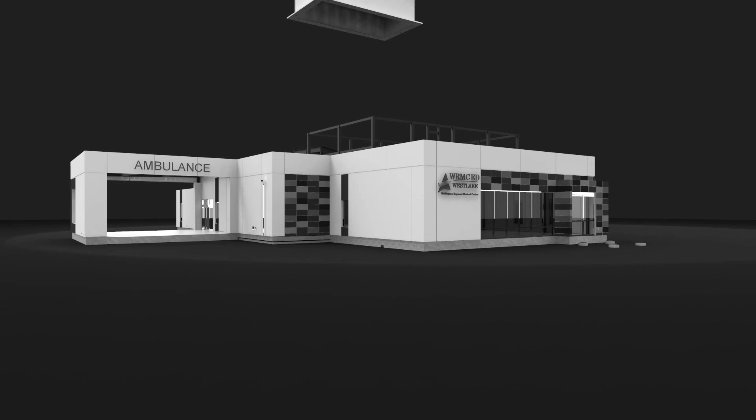In 2000, Honda Motor Company came and said, Chris, we would like for you to lead the design and construction of a really big project in Alabama. It was important for our state. And they said the first phase of the project was a training facility, and it needed to be open 1 year before the big factory was open.

And so we had our first meeting. It was a kickoff meeting. There was no official program. There was no equipment list. There was really not much more than the Japanese leadership saying, we want a world-class facility to train 4,000 workers in 200-person shifts, and we want it 9 months from yesterday. And we, of course, because that was the type of people we are, we said, yeah, that sounds like a great amount of fun. We will take that on, and we did.

Fast forward to our second meeting, and we learned 3 things about the Japanese and their leadership style. Number 1 was they offered all of Honda's resources to help us help them be successful. It's really important. I don't think we would have gotten there without that notion. The second thing that they revealed to us was that I think this was not the first time they had asked their trade partners to solve a really hard problem. And the third one, which was the most important, was there was not a chance in the world that they weren't going to open this thing 9 months from last week.

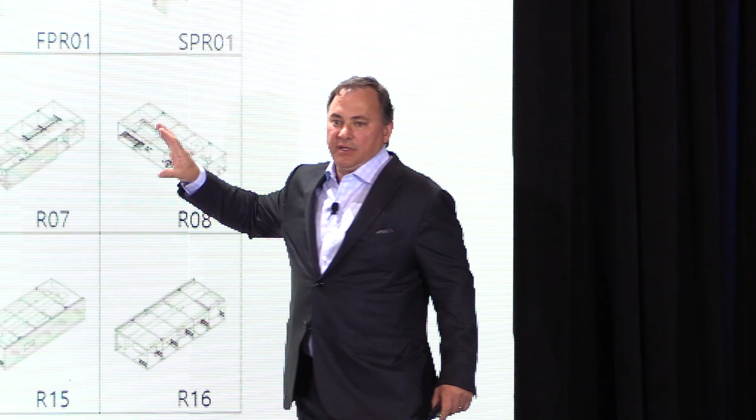I believe that if they ever write this story, this picture, which was Innovation Memorandum 21, Greg Stein published in, say, 2014. But this is the one where he said, these are our parts. We work in 38 states. We have several hundred hospitals, but these are our standard parts. Our standard bathroom, BPR01, it now has a model number. It's a SKU. There's a head wall for med-surg. There is an overhead ceiling rack.

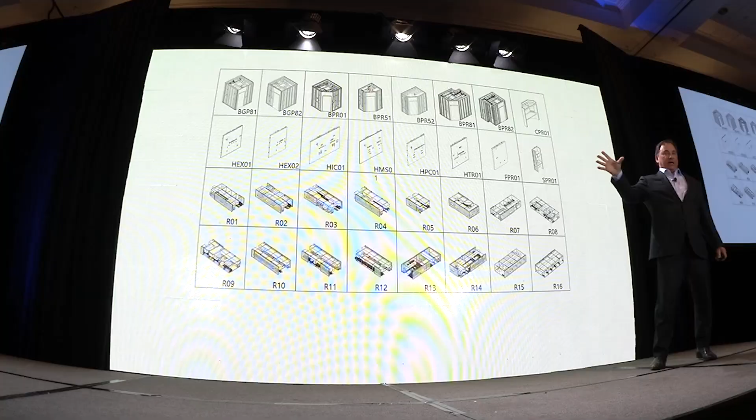There are surgical racks. There are a series of standard parts that defined their standards, not as a design standard, but as an intelligent standard, a manufacturable SKU that could begin to change the supply chain systemically. So these pieces are really interesting, and interchangeable parts become the ability to make a programmatic level decision instead of a project level decision. And these pieces are installed routinely from Miami to Las Vegas.

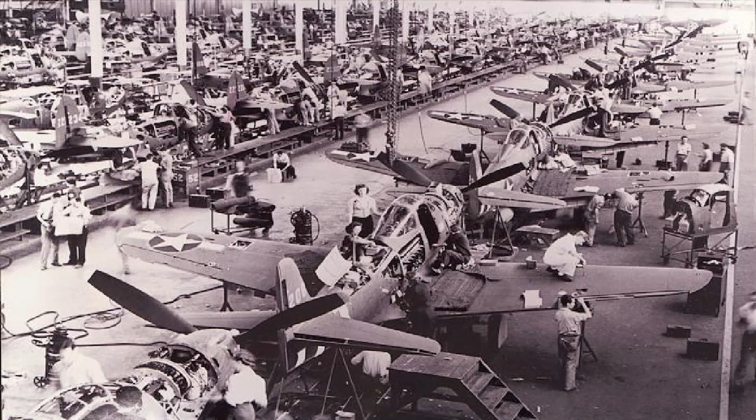And what we learn when we do this is that the way we were making the parts in version 1 was a lot the way they were making the P-39 Airacobra. It is piece by piece. And what we wanted to do is rethink that to a thing that Boeing has adopted in the 21st century to make the 787, which is called chunking.

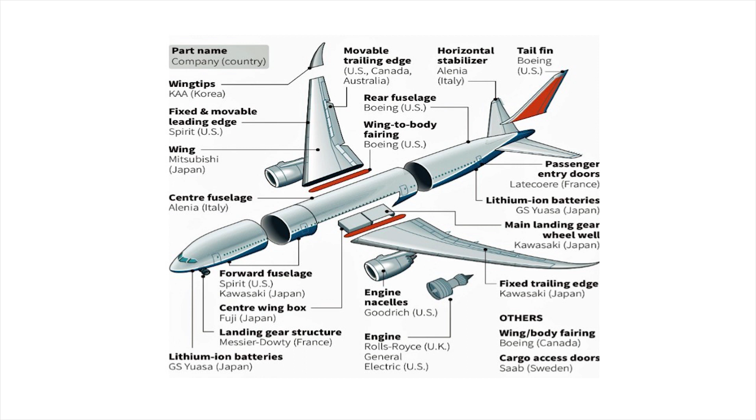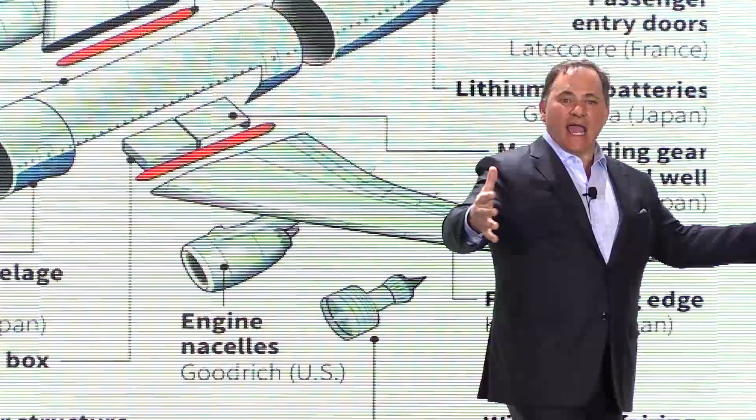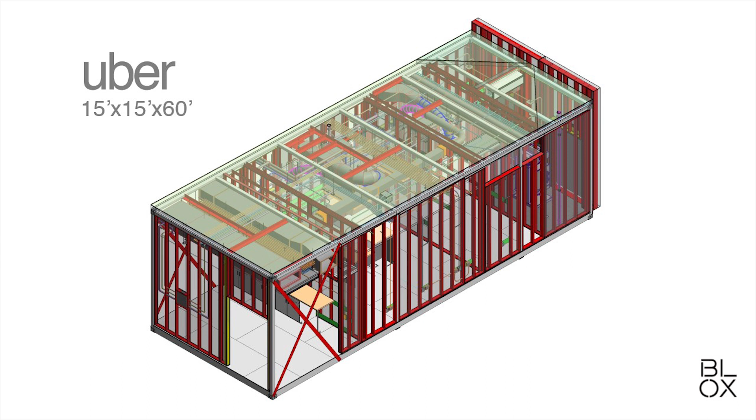Our chunk is called an Uber, and an Uber is not to be confused with ride sharing. It is the largest DOT transport. It's 15 feet wide, 15 feet tall, nominally 60 feet long. It's a red iron structural steel piece that can be stacked 30 stories high. In it, in that universal frame, is a lot of complexity.

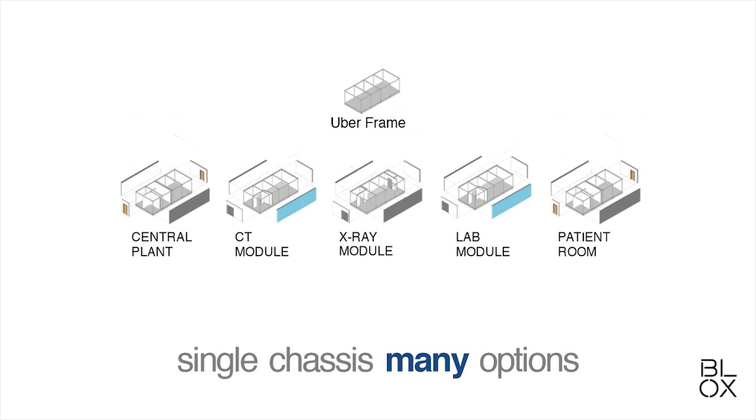We can put a central energy plant in it. We can put a CT. We can put a lab. We can put X-ray. We can put a patient room. We can put a dietary in it. We can put any number of things, and we're adding things all the time.

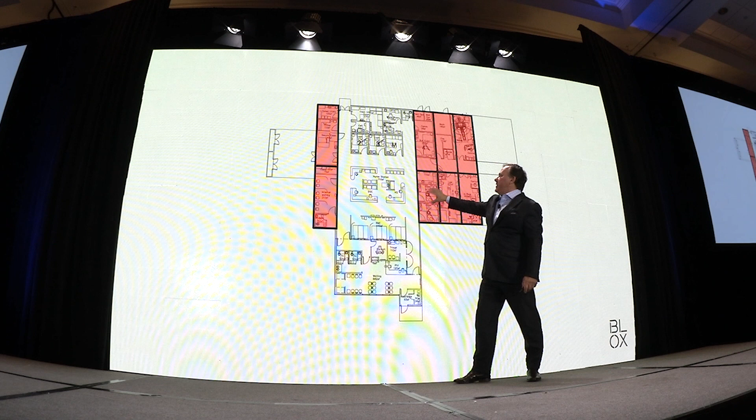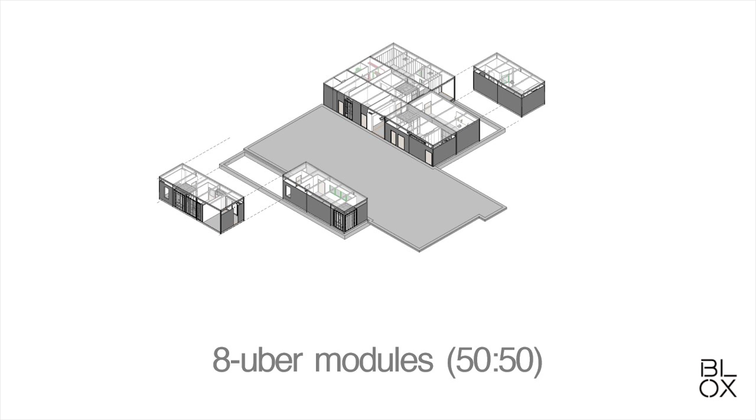We go to the job site, we pour the foundation, it's a stem wall. We add the Uber modules, which represents about 50% of the overall complexity of that building. We add the flat pack steel. We put the exterior siding on. By week 6, we're dried in and conditioned. We put the other modules in, the overhead MEP racks, and then we begin to analyze.

Our analyzing of the data shows that 1, 2, 3, 4, 5 of these were our first group. Our design time went from over a year for the first one. Imagine we're not making a single project, we're really making a platform, to half of that time for the second, still learning a lot, to a third of it, to where we're producing these things in 45 days pretty nicely. A lot of gains on design. There's a corollary to cost with that time.

Manufacturing, our COO, Laura, took over 100 days to build the first batch of 8. It was pretty painful to watch. But her second one was a lot faster. And her third one was faster still. And now she's making one, need to check the numbers, but around 25 days to produce a whole set of the components that it takes to make one of these buildings. Pretty exciting.

And then you can see why I love construction so much. We have improved not one whit. We have now done it 5 times, not a single improvement. In fact, if I look at the micro graph up there, it got worse. We regroup and we decide, how do we fix that aspect of it? We're going to take it 2 ways. Number 1 is we're going to shift more from construction to manufacturing, which means that we have to move it all the way back to design. And the other one is we're going to work at getting better at being a contractor.

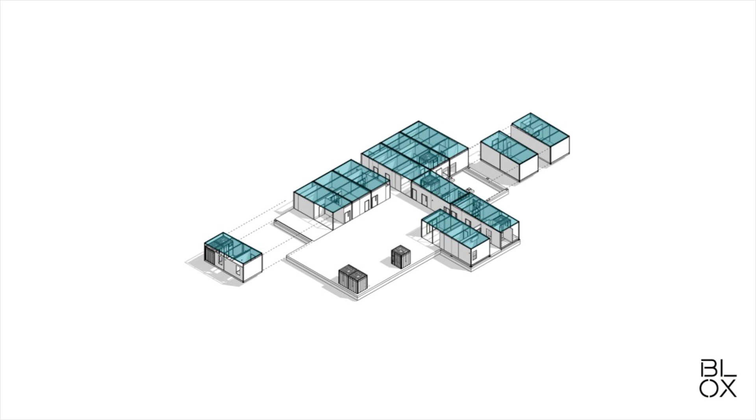And so HCA was our next group of 5 projects, and this is underway now. And instead of doing 8 modules, we did 15 modules. It was a redesign, really powerful, and we began to see that the design, we've done the 5, gets better, manufacturing gets better, and construction, we're about right here now. We get to see what happens on this next one. So these should be dotted because this is what we'll show next year. Did it actually get better?

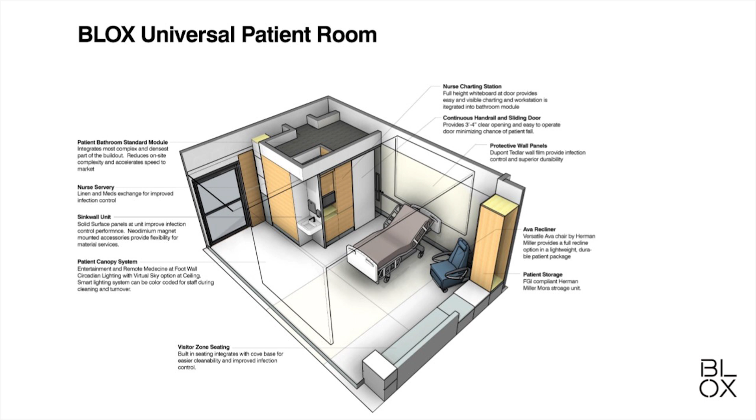When this happens, we will have unraveled the Gordian knot of higher quality at a faster rate at the same or lower cost. The next thing is design manufacture version 3, which is the real holy grail of what we're working on. It is how do we deal with acute care at a significant level.

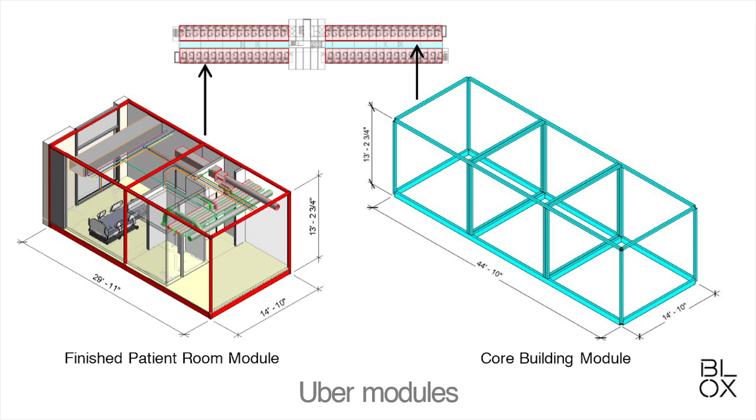This represents a patient room, a universal patient room. It has a lot of complexity in it. Each one of those parts is going to ultimately be best-in-class materials. It becomes the iPhone of patient care. It works in an Uber module. The Uber module can stack 30 stories high. It can be a way that we will very quickly expand the breadth and depth of what we're doing in healthcare to achieve, hopefully, twice the quality at twice the speed at half the cost.